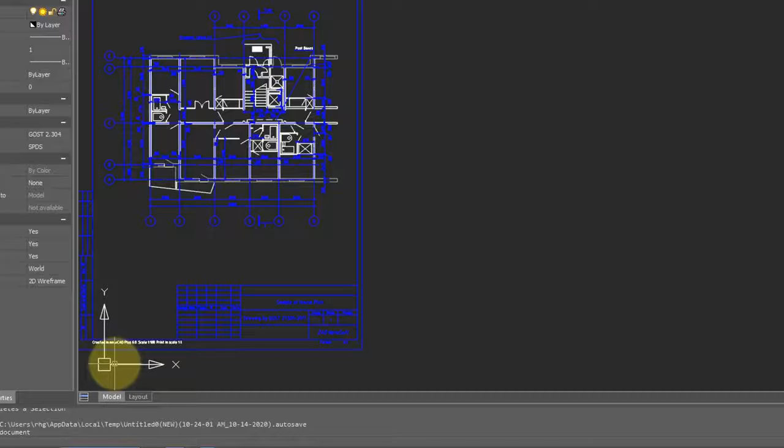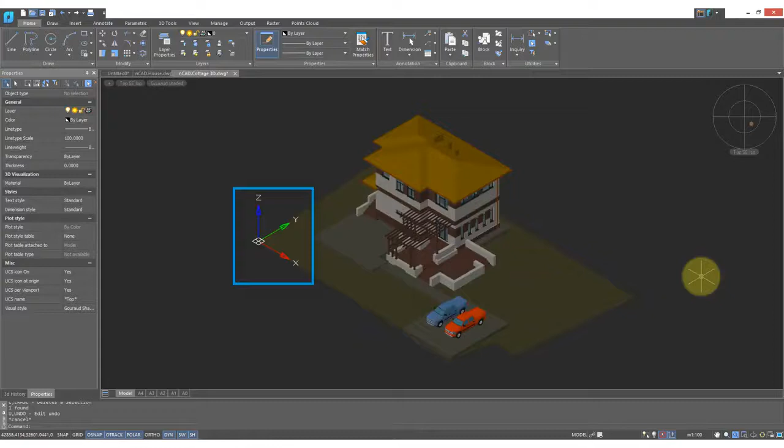Let's see how the UCS icon helps us in 3D modeling. Right now we're looking down on top of a 3D model. You can see the UCS icon from before. If I switch to a 3D viewpoint, then the full UCS icon appears, and you can see direction of Z, direction of Y, direction of X, and their related colors. This is useful because if I, for example, were to go underneath the model, then we can see where the Z is pointing upwards, and it leads to less confusion.

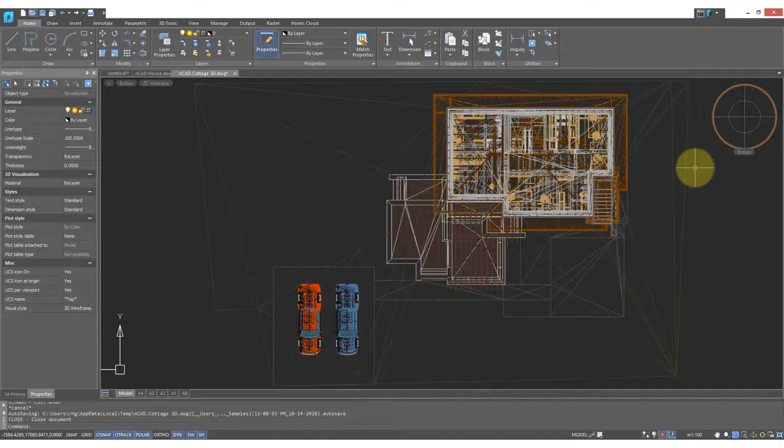The thing that makes 3D modeling difficult is that you're dealing with 6 sides. Recall that a 2D drawing has just the one side, the top view. In 3D models we have the top view, the right view, the front view, the left view, the back view, and the bottom view. So there's 6 sides to every 3D model. When we look at the front, it's hard to see the back. So that's why NanoCAD makes it easy to switch views.

When you come to this locator, you can quickly select standard views, such as this top northeast isometric view, meaning that you're looking at the drawing from the northeast and looking at the top of it. Here's the opposite, the bottom southwest view.

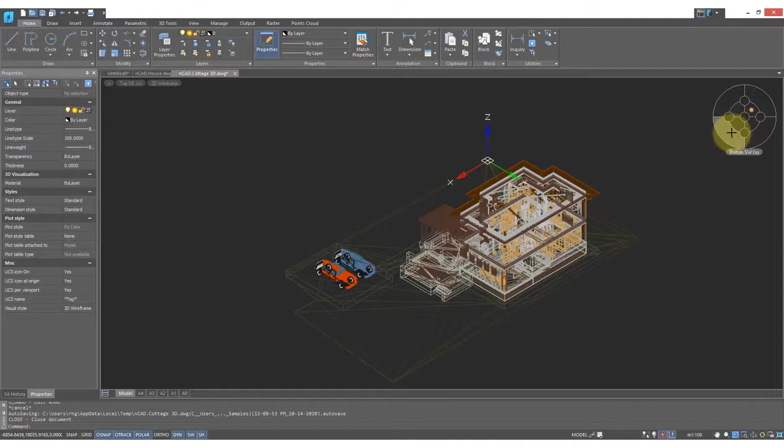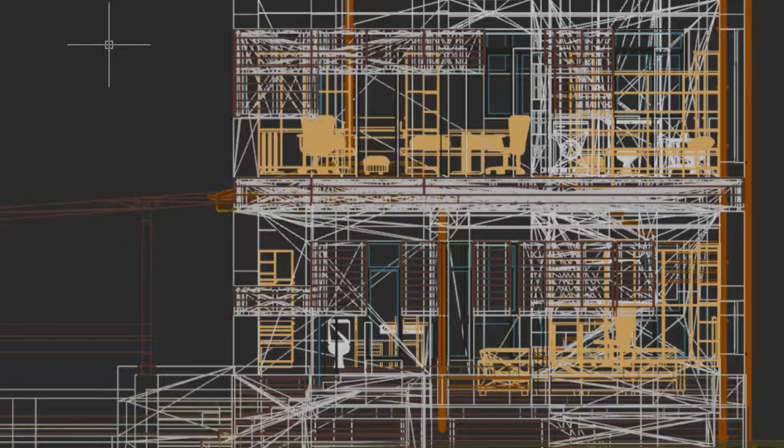Another aspect of confusion with 3D drawings is that you can see right through them. And so here with this house model, we have a mishmash of lines. Technically, each of those lines is the edges of a face that makes up 3D objects. Fortunately, NanoCAD makes it easy to switch to other viewing modes. So for example, right now, we are in 2D wireframe. If we go to hidden line mode, this means that NanoCAD hides all the lines that are behind the faces we are seeing right now.

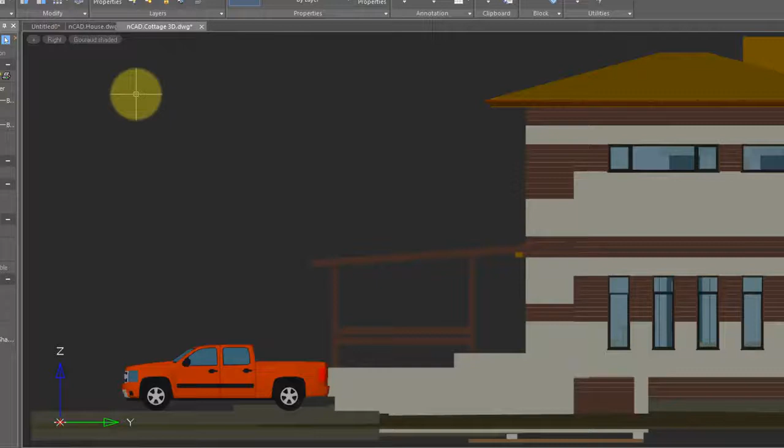A bit prettier one is called Gouraud Shaded, and that one lets you see the house a little bit more realistic, even through the windows. Let's quickly change the viewpoint and admire the entire model. Sometimes you'll find one form of shading more convenient than others, and so it's good that NanoCAD makes it easy to switch between them.

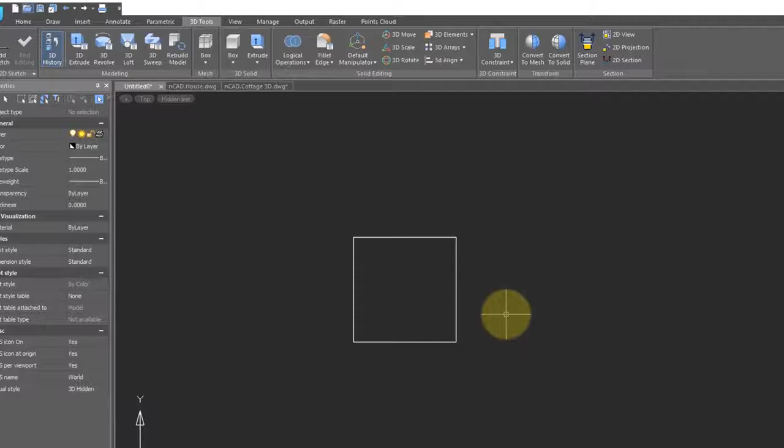A surprising amount of drawing in 3D is actually done in 2D. And what I'm doing here is I'm drawing a 3D box so I can show you how 2D drawing works in 3D. So I've drawn the 3D box using the box command from the 3D Tools tab. Let me put it in an isometric view so we can see the whole thing. Drawing on a 3D object is done with the dynamic UCS command. This is a UCS that applies to faces, and the best way to understand it is to see it.

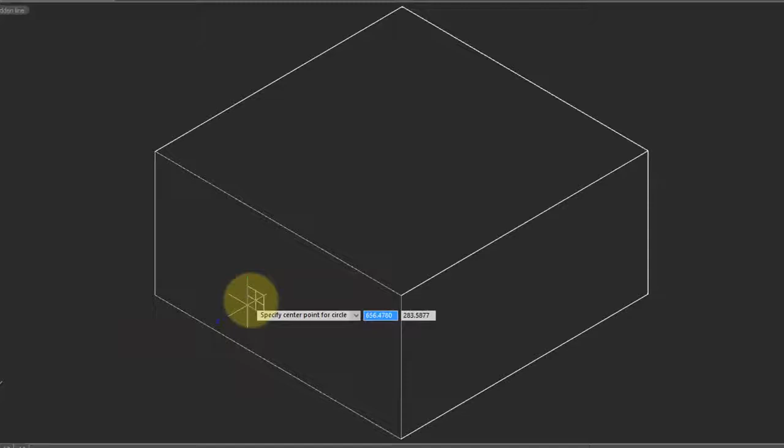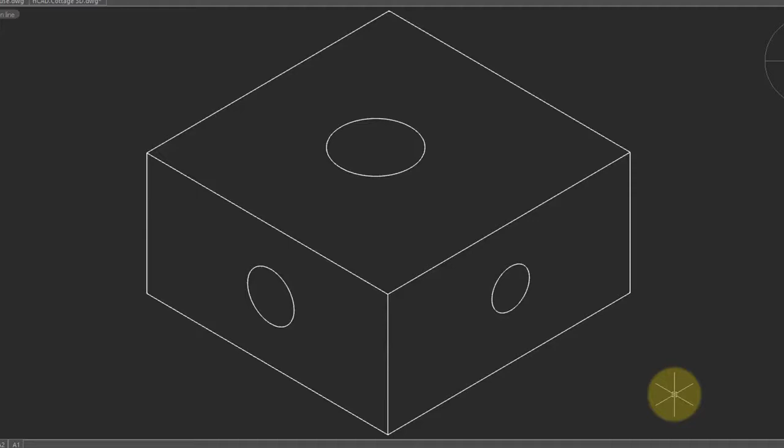So I've got it turned on down here on the status bar, and then I'll start something like the circle command. And as I move the cursor over the different faces, notice that the UCS is reorienting itself to match the faces. So I'll click, draw the circle, repeat the command, draw another circle, repeat the command, and draw a third one. Now if you didn't have dynamic UCS in NanoCAD, then this would be extremely difficult to do. But NanoCAD makes it easy for you.